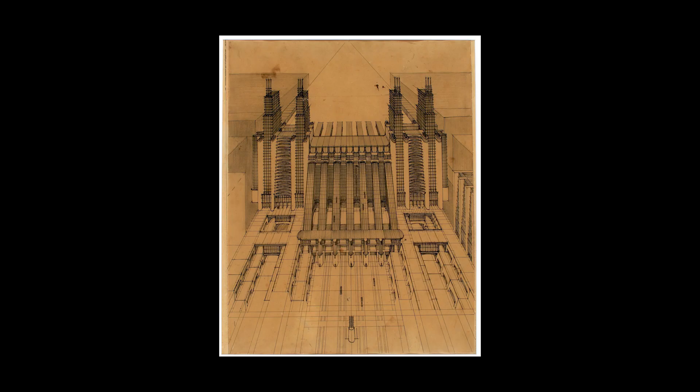Modernism developed across all fields, not just in architecture, but as a means of accommodating and responding to new technologies, advancement in machines, automation, urban planning, and design. The Industrial Revolution played a significant role in developing modernist architecture by functional priority. Modernism encompasses many ways in architecture, including futurism, constructivism, brutalism, de stijl, and Bauhaus.

In the summer of 1927, Mies van der Rohe served as the first vice president of the Deutscher Werkbund, translated as German Association of Craftsmen, and the originator of the exhibition Die Wohnung, translated as The Dwelling, called the Weissenhof Estate. It is located on the grounds of Killesberg in Stuttgart, Germany. This was the first attempt to solve the problem based on modern design principles.

This was a collaborative project with very well-known European architects, including Mies van der Rohe, Le Corbusier, Walter Gropius, Peter Behrens, Victor Bourgeois, Richard Döcker, Joseph Frank, Ludwig Hilberseimer, Pierre Jeanneret, Jacobus Johannes Pieter Oud, Hans Poelzig, Adolf Rading, Hans Scharoun, Adolf Schneck, Mart Stam, Bruno Taut, and Max Taut.

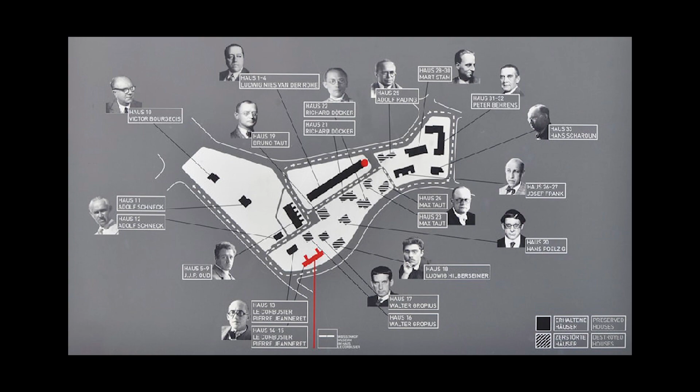Weissenhof was advertised as a prototype of the future of decent and comfortable homes, regardless of social status. Its housing was customized and furnished on an affordable budget using standard mass construction techniques. This was important because of the upcoming advancements in modern housing with functional living.

It showcases the aspiration to provide affordable, simple, efficient, and good quality built housing. It focuses on functional living, clear geometry, and the repetition of modular forms. It forms an international style in architecture.

Considering function in modern architecture was originally introduced by Chicago architect Louis Sullivan, who coined the phrase form follows function, which was intended to focus on the form of the building following the interior space.

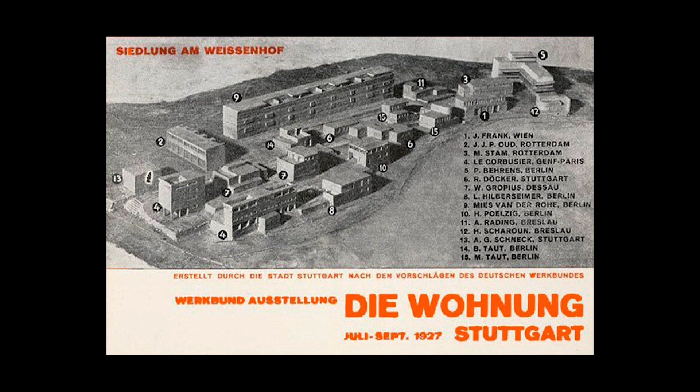This demonstrates what early modernist architects wished to see in the future of modern housing. This was an opportunity for them to demonstrate their housing internationally. The idea of space and function in architecture became the main topic in the modern movement, with the purpose of creating better living standards and experiences.

This project is seen as the Bible of housing when looking at modernist architecture and is considered one of the most significant landmarks of modern housing. At a subsistence level became the self-imposed order of the architect and was also the dominant theme of the first CIAM congresses.

As the existence of modernist buildings was negligible, time passed to the year 1928, when the request of prominent architectural figures of Europe led to the first meeting of CIAM, known as Congres Internationaux d'Architecture Moderne, or International Congresses of Modern Architecture, an organization founded at the Chateau of La Sarraz, Switzerland, led by modernist architect Le Corbusier, Karl Moser, and art historian Siegfried Giedion.

They proposed advancing modern architecture to rationalize and utilize improving low-cost dwellings in the interest of society worldwide. CIAM's goals were: 1. To formulate the contemporary program of architecture. 2. To advocate the idea of modern architecture. 3. To forcefully introduce the idea into technical, economic, and social circles. And 4. To see the resolution of architectural problems.

And two drafts of a work program consisting of six questions to the Congress were: 1. Modern architectural expression. 2. Standardization. 3. Hygiene. 4. Urbanism. 5. Primary school education. And 6. Governments and the modern architectural debate.

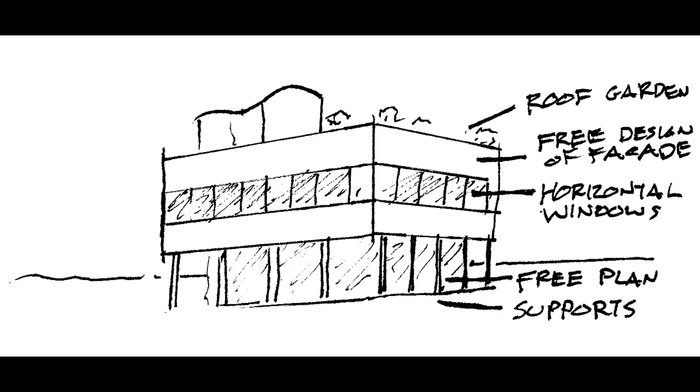This prepared Le Corbusier's shift in his architectural philosophy of five points in architecture, including pilotis, open floor plan, open facade, horizontal windows, and roof garden.

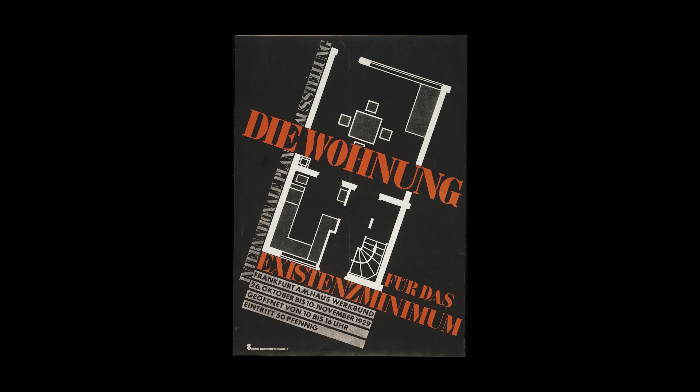One of their proposals, CIAM 2, Existenzminimum (Minimal Dwelling), focused on improving urban dwellings, open plans, and open facades, using reinforced steel and concrete to construct large-scale buildings.

In designing the well-known structure House 1-4, Mies van der Rohe kept two lots of the Weissenhof Estate for himself. He ensured these lots had a scenic view of Stuttgart at an elevated vantage point. The design was different compared to the other houses.

He designed a four-story residential building with the facade consisting of a homogeneous field of white plaster and black fixtures, and balconies that defined the entrances. The structure is articulated over these four levels and has a garden terrace roof designed for multiple uses. This was used as an expression of abstraction and minimal design in a modernist aspect.

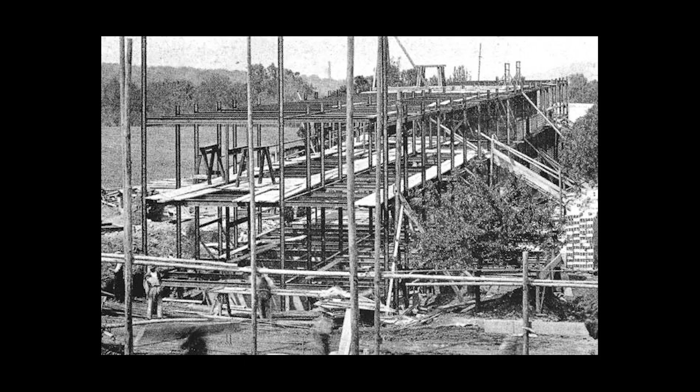As Mies was overseeing the construction of the residential building, he used a skeleton structure or steel structure frame that characterized the geometry of the elevation of the site. This was the appropriate system of construction in this respect. It enables rationalization of production and allows freedom of internal structure.

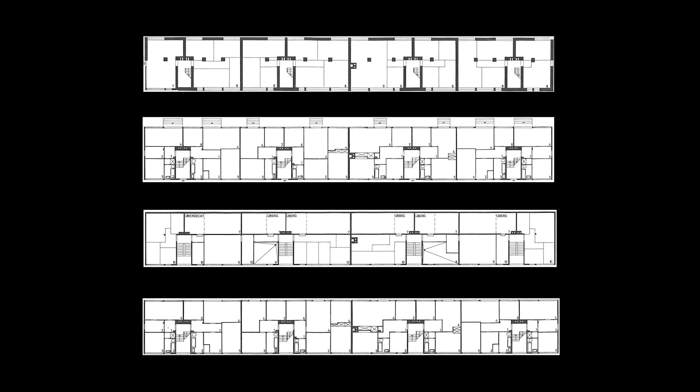This is where Mies introduced a flexible and adaptive plan and adapted it to residential needs. Setting out the kitchen and bathroom as fixed points on the plan with accounts of mechanical services allows the remaining space of the apartment units to be divided into variable partition walls, and its reasonable living requirements can be satisfied. The internal framework ensured that the partition walls could be laid out and configured for residents' personal lifestyle needs. Therefore, the design is different regarding geometries and functions without any constraints.

Mies said he had chosen this design concept to accommodate changing conditions, their expectations of concern within the apartments, and their desire for maximum freedom in designing their own interior spaces.

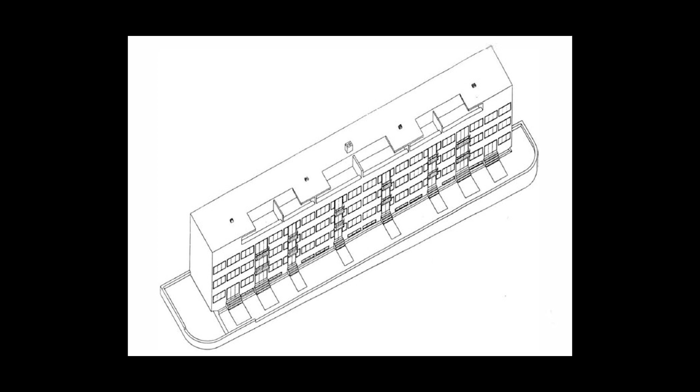Furthermore, the design of Mies van der Rohe House 1-4 deserves the attention of its function and concept of space within the interior. The construction of the skeleton structure is important, as other architects would use the analogy of automobile construction in their buildings. The reason is as automobile construction is very well built, leading to their buildings being constructed to a high standard.

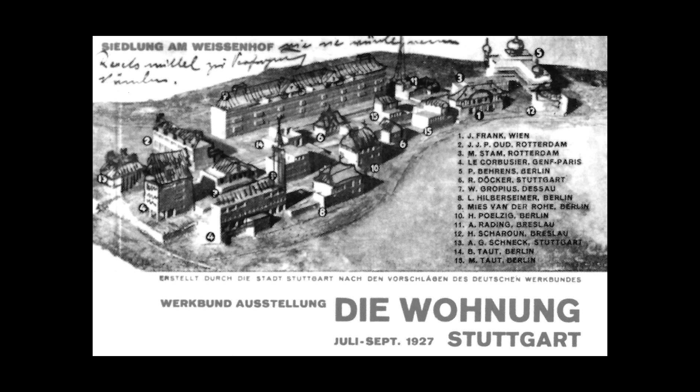During the interwar period, architects confronted the uprise of population and building of mass with rational and functional living spaces. In 1929, the CIAM 2 Existenzminimum Dwelling held its second Congress. Their proposal was tested against the formulation of space standards of necessary minimum to increase the quality of housing and reduce the construction cost. This approach formulates Mies van der Rohe's idea of manner.

The question of rationalization and standardization is only one aspect of the problem as a whole. Rationalization and standardization are a mere means to an end. They should never be allowed to become the end in themselves. The underlying problem of the new dwelling is essentially mental, and the struggle for the new dwelling is merely one aspect of the overall struggle for new forms of living.

Understanding Mies's manner is presumed in the search for a minimal design for living conditions and hygiene. These were part of the work program draft submitted by Congress. The spaces of the Weissenhof Siedlung houses 1-4 were to maximize and personalize the lifestyle needs of residents.

Regarding the design of kitchens, removable furniture and storage spaces, rational and, above all, minimum housing and the room sizes mainly depend on the layouts of the furniture in an area. In perspective, Mies's design concept to accommodate the changing conditions for residents in the space of Weissenhof Siedlung houses 1-4, the room can be limited to a certain extent in configuration to lifestyle needs and functions. This suggests that Mies experiments on the overall struggle of the uprise of population.

The design was a two-family home structure known as Houses 14 and 15, coordinated by Mies van der Rohe, who needed Le Corbusier's participation, who was influential at the time and contributed his home design to the development in 1926. He invited Pierre Jeanneret to design two detached residences for education purposes for the middle class.

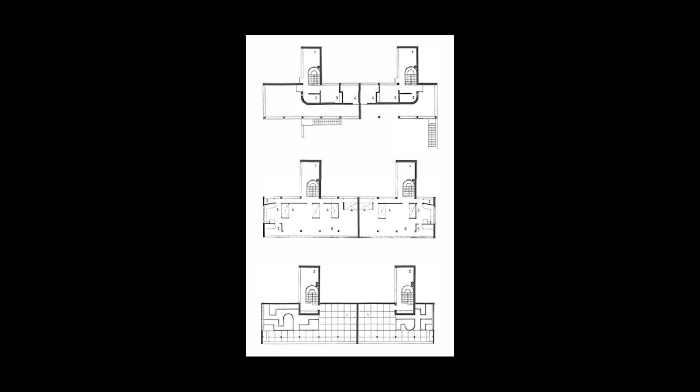The committee wasn't convinced by the two dwellings and pushed Le Corbusier to have only one dwelling. However, Le Corbusier was not willing to negotiate the proposal. Of the 21 structures designed by 17 architects within the development, House 14 and 15 attracted the most interest, receiving both positive and negative comments.

Le Corbusier described it as a machine for living. It was designed with the logic and precision of automobiles and airplanes. It demonstrated the principle of extreme producing and would become the early manifestation of his revolutionary vision for the future of architecture. It was designed by Le Corbusier and Jeanneret and became a critical prototype in 20th century architecture. The house consisted of reducing cost, simplifying housekeeping, and improving living conditions.

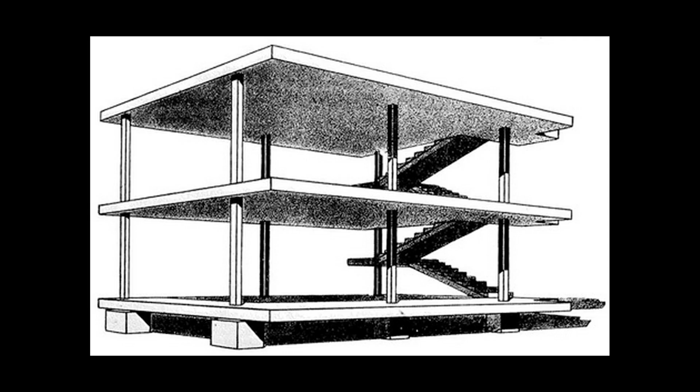The structure was made out of reinforced concrete to embody the qualities of Le Corbusier's 5-point manifesto. This housing theory of the 20th century incorporated columns to lift the building above the ground, the roof garden, the free plan, the long windows, and the free facade. The 5 points included:

1. Pilotis. Instead of walls, it has columns or pilotis, arranged at certain fixed intervals. The entire building was positioned on columns, retaining the garden underneath the building and removing it from contact with the damp earth.

2. Roof gardens. These enabled a thermal barrier against exterior temperatures. The roof gardens represent, for a city, the requisition of the entire built-up area.

3. The free layout on plan. The pilotis system enabled open-plan living and partitions to close rooms off. There were no load-bearing walls, creating an easy construction method with more feasibility.

4. Strip window. The rectangular openings in the facade had good light and air control, resulting in the internal space being evenly lit from wall to wall.

And 5. Free elevational treatment enabled the design for each floor to cantilever out beyond the load-bearing columns, rather like a balcony drawn around the building, pushing out over the load-bearing structure. This allowed more flexibility and completely freed the design, allowing the floor plan to adapt to the time and condition of the occupants.

The exterior of the house showcases his ideology. The horizontal windows gather natural sunlight into the open spaces. The roof garden has an open frame. The roof demonstrates another world in planning that brings a sense of home to residents.

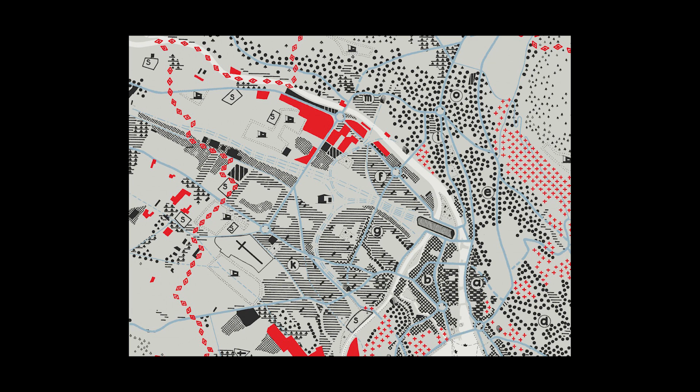One of the theories they worked on was the functional city. The idea of modern architecture includes the link between the phenomenon of architecture and the prevailing economic system. CIAM created the functional city theory: land planning based on zoning by functional categories, reflecting a more significant shift in planning through the 1920s away from three-dimensional urban design. The CIAM urbanism stressed the importance of architects influencing public opinion and government clients through academic training, with theoretical consideration focusing on minimal dwelling.

Furthermore, these two case studies summarize similar characteristics in the modernist movement: the desire to focus on function, decrease construction costs, and increase the quality of living.